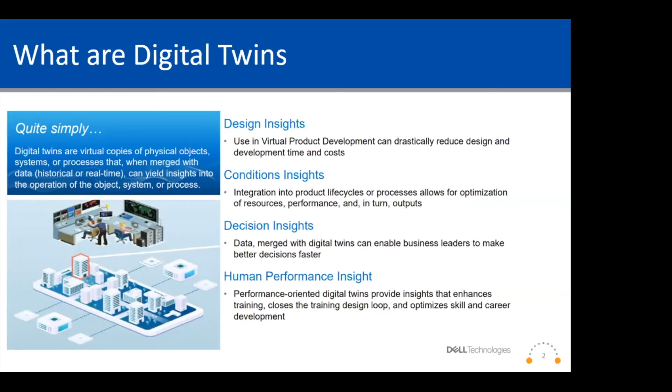So the digital twin effectively bridges the physical world with the digital world, providing data-driven insight for optimizing the source—in this case, the things, the places, or the people generating the data. By example, using predictive maintenance to maximize the value of the asset by extending its life, or to optimize the flow of product through supply chain optimization or assembly line optimization.

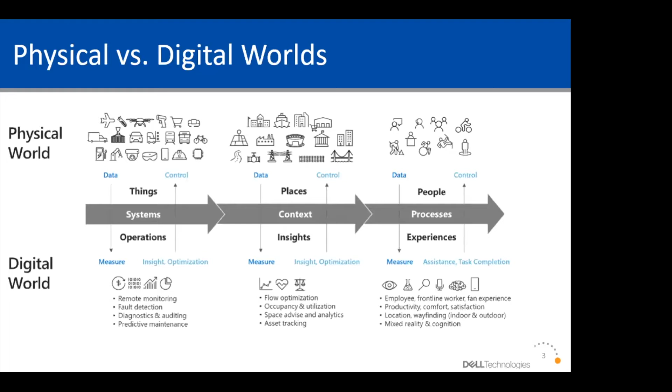Sensors can collect data about the impact of the external environment on the asset, and vice versa. In fact, through these technologies and others—such as 3D scanning for point cloud visualization—and other techniques, the digital twin can effectively take on a life of its own and be used to provide key feedback based on complex real-world data-based what-if scenarios that may or would not be possible to run on the actual physical asset. So with that idea in your mind, I will turn the presentation over to my colleague, John Turner from GAFCON.

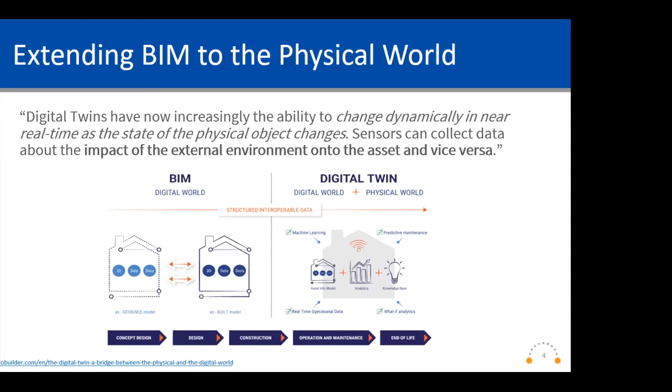John? Thank you, Dan. Good morning, everyone.

So in the background is one of our projects in San Diego, the redevelopment of Seaport Village and the waterfront. This is just one of the projects that we are applying some of these principles to.

So we're very much focused on the system supporting the complete life cycle. I'm assuming you're all familiar with integrated project delivery, which focuses on human collaboration through the entire project life cycle, from planning through design, procurement, construction, into operations. What I'm going to show through a very quick video is how data collaboration can support that human collaboration in very different ways.

I'm going to show you how you can use systems that you're all probably using today in a very different way from an owner perspective, very much focused on what we call the serial builder—doing the same things over and over again, or within the project, extracting the commonality in the project and making sure that things don't have to be created any more than once. And we have that digital thread.

So Dan, if we go into the video, and I'll narrate the video, it's about a 5-minute video.

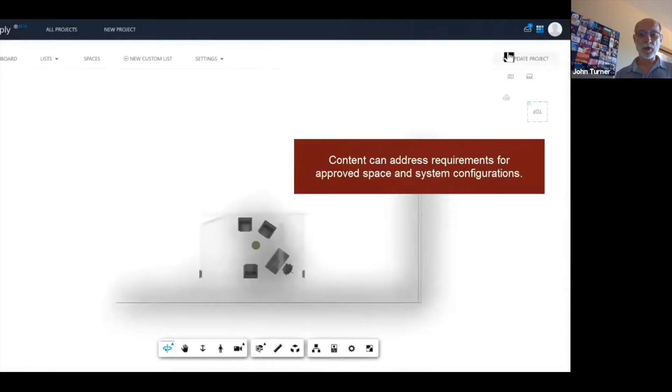So we start off with a product catalog, which is not only giving the objects which can be used directly by the architect or the general contractor, but we're also extracting commonalities. So here we've got offices and conference rooms, and these can be provided as collections of BIM elements that can go directly into the design authoring system.

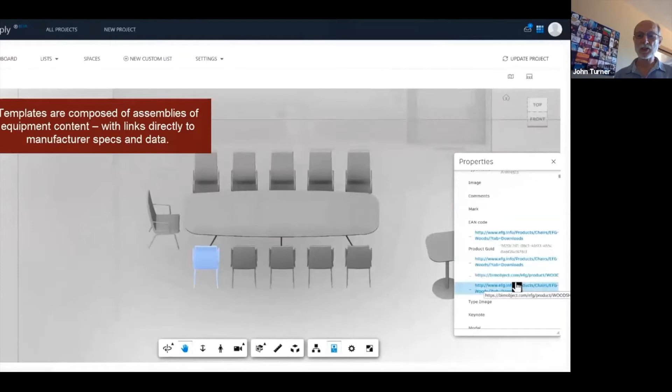But what I'm going to do is narrate this from the perspective of an office chair to show how data can be externalized from the BIM and then tracked all the way through the process. So you can see the office chair has been highlighted. We can take it from there to external websites or to external data sources.

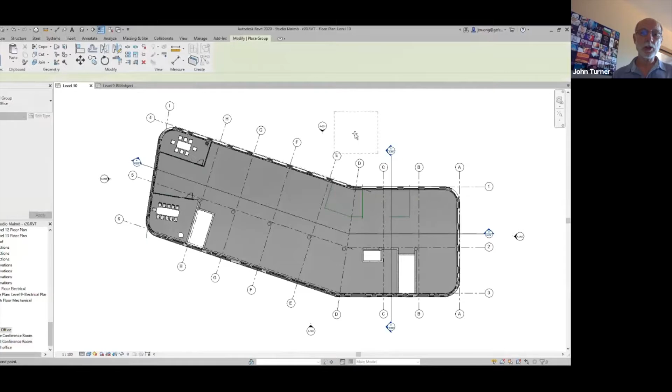We can then bring in these building blocks very much like Lego. Rather than building the entire Lego with what I call 1 bump bricks, we can start to use 4 or 8 or 16 bump bricks, and go through the design process much faster. We're not only dropping in the visual elements, but also all the externalized data elements.

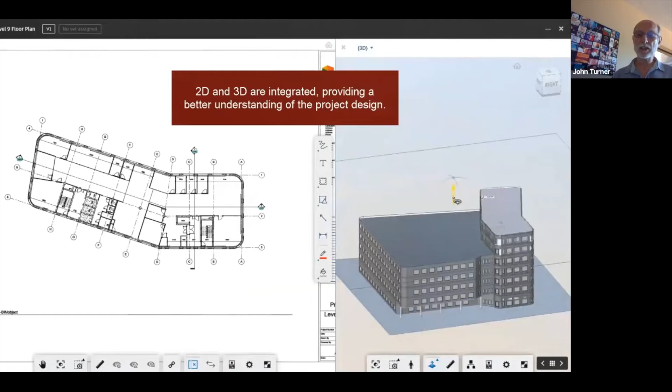A key aspect of controlling a project like this is to make sure that everything is kept within the same data model. So you'll all be very familiar with the concept of making sure that sheets are extracted directly from the BIM, from the 3D representation.

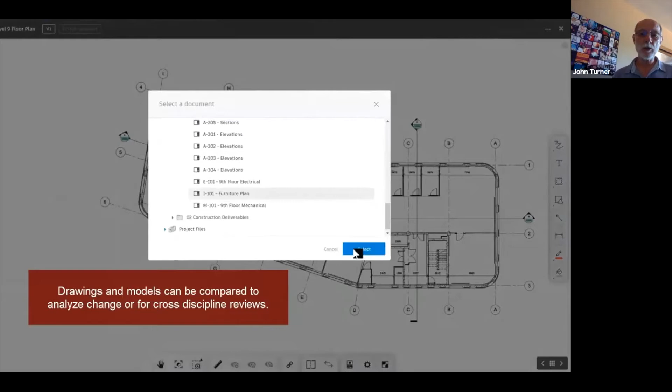You can see the conference room that we're going to use as our model, and here on the left-hand side is the floor plan. But if you've got a separate architect working on the furniture layout, the interior plan, we can now bring this directly in. We're using BIM 360, which you'll all be familiar with, to do this.

We can overlay the two plans, and we can see exactly what has changed from version to version of these drawings through visual highlighting. That's all done because of the data modeling.

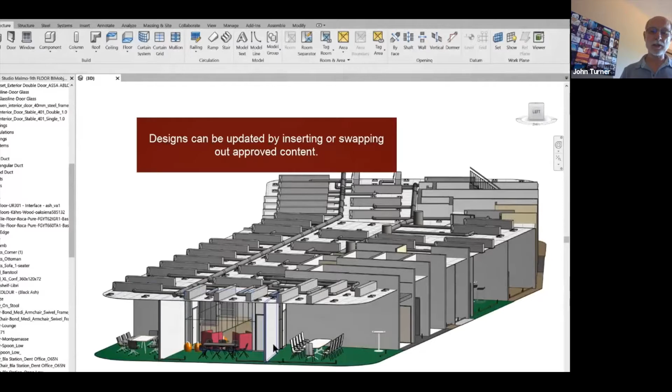Now we go into a standard collaboration environment. We bring in all the disciplines. And even at this stage, we are linking back to these external data sources so that we can start to make changes. So here's the chair.

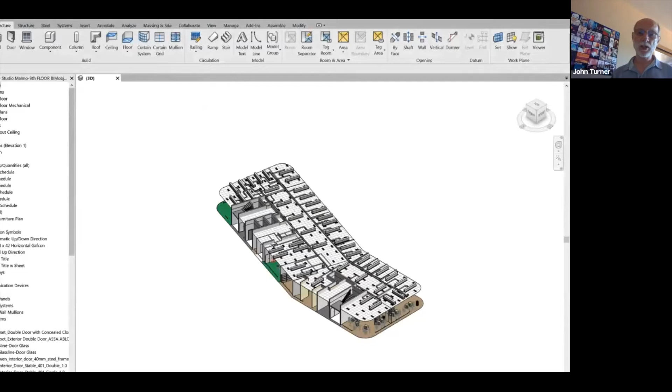What happens if I want to change its color? I want to change it from the gray to a red. I can do that now externally by working on the data source. That updates everything in the BIM—one change rather than finding every single change.

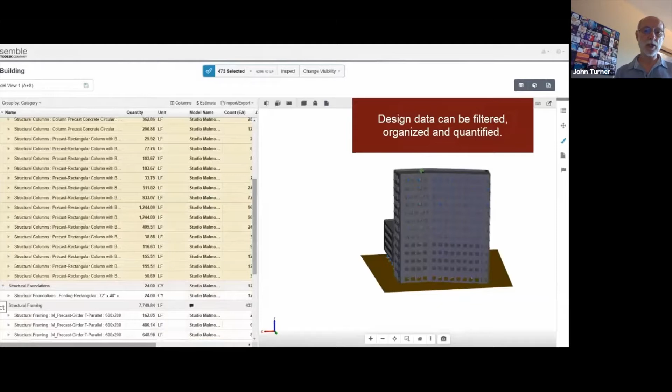As we then go into looking at costing, again using a standard software package, Assemble, we can go in and start to link all of the BIM elements because we have very strict naming conventions around the BIM elements. We can link those directly

to cost elements, and we can start to do value engineering with the owner in real time to see exactly how changing some elements is going to change the overall look and feel of the building, but also the cost of the building. So this is all done through making sure that the data elements are specified.

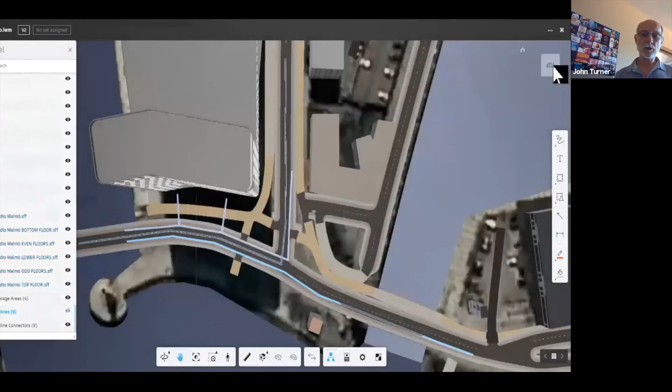When we're working on a campus, because we're always working in absolute coordinate systems, we can bring that building in and drop it into a geographic information system. So we can start to align it with utility information coming from public authorities, or we can start to link it back to civil engineering software.

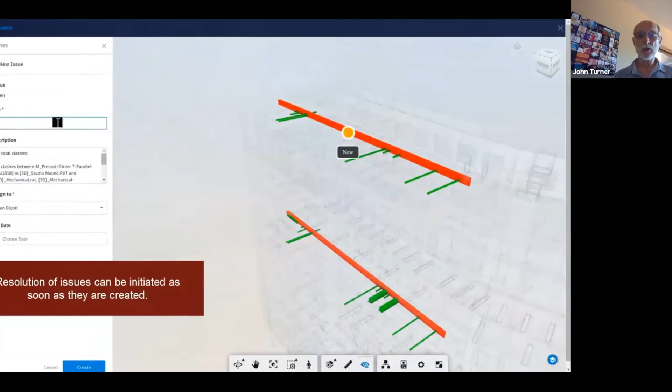Whereas architects think and design as though the world is flat, civil engineers have to design with gravity in mind. Linking the two often uncovers issues in the design stage, which would cost a lot of money in the construction stage. You'll all be familiar with using BIM for clash detection, but here we're not only using it for clash detection, we're starting to link it back to issues, and on a serial builder basis, we can make sure those issues are tied into lessons learned, so that from one project to another we're not encountering the same issues.

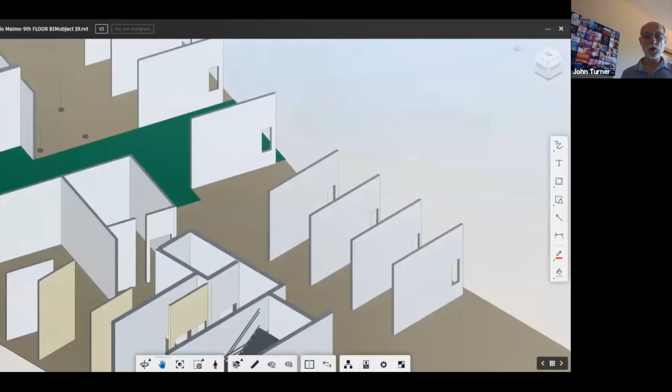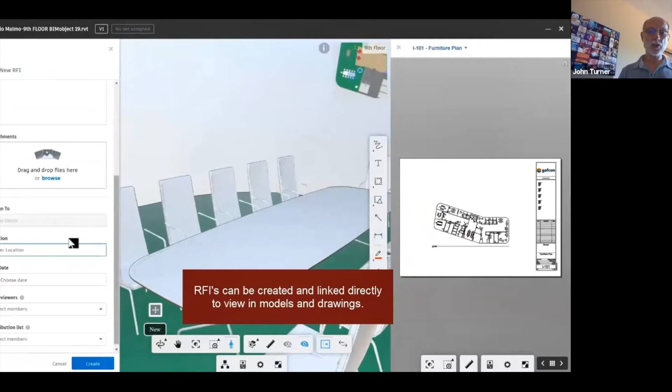You'll all be familiar also with the use of virtual reality. One of the common causes of project overruns, and remember those two red chairs when we go into the conference room, is owner changes. If we can show the owner what they're getting, and link everything together, the 3D, the 2D, and all the issues in a common environment, it's a lot easier to keep track of everything happening within the project and make sure the owner is making the correct decisions, even though they're not familiar with a lot of the technology.

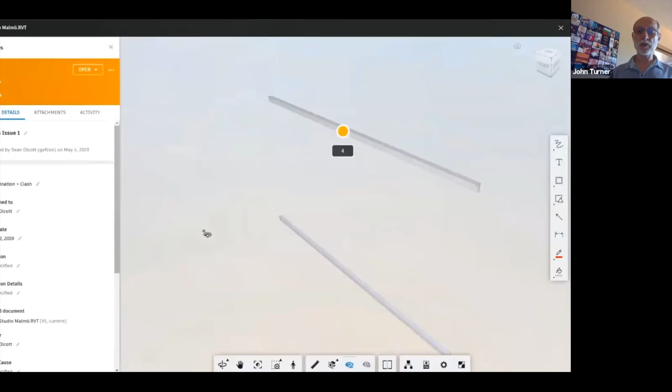We're also able to put together dashboards so that the owner can be communicated with very easily within the process, and drive directly back into the visualization of an issue, taking them directly into the BIM and into the associated documentation.

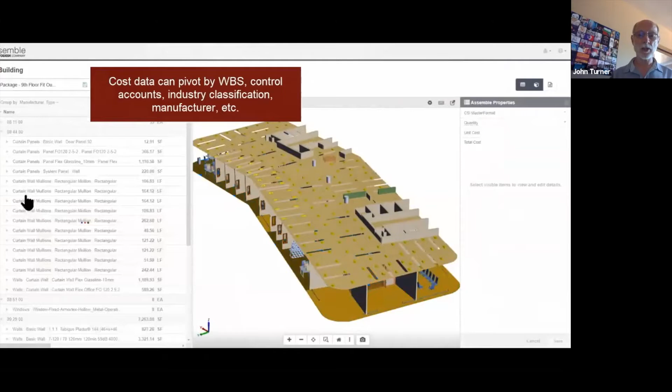When we get into the construction phase, we can then pivot the data once again, and in this case we're pivoting into a MasterFormat perspective of the data. It's exactly the same data model, you can see there's a slightly different visualization of it because we're focusing on a scope given to a particular contractor. So there's no argument about what is in scope or out of scope - we're not describing it in words, we're describing it in data.

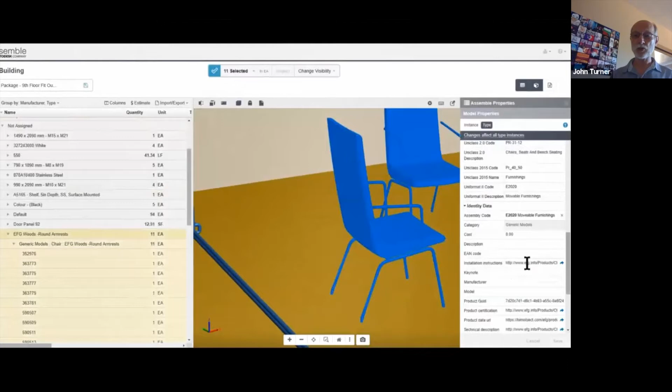Here, if the contractor wants to come back and change something, again here's the chair - if they decide they want to associate an individual cost with that chair, it can be done straight into that data model.

And then when we get into operations, we're going to do a Matterport scan of the finished building. As we walk through this building, you'll see a number of tags which link back to data. You'll see the same walkthrough as though we were doing it in virtual reality, seeing the same two red chairs which were modeled.

We walk in now to the actual conference room, and that chair has all the data available from all the upstream processes, which can then be flowed directly into the operational digital twin.

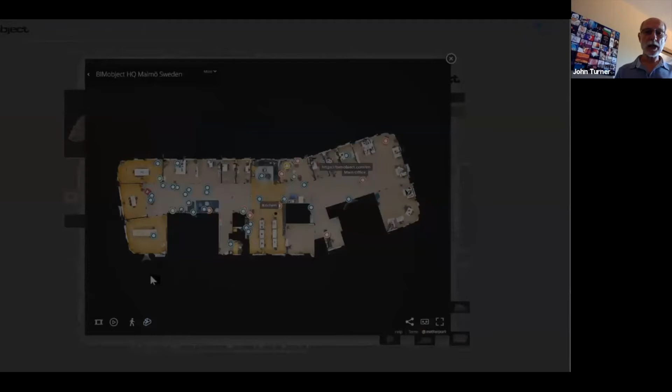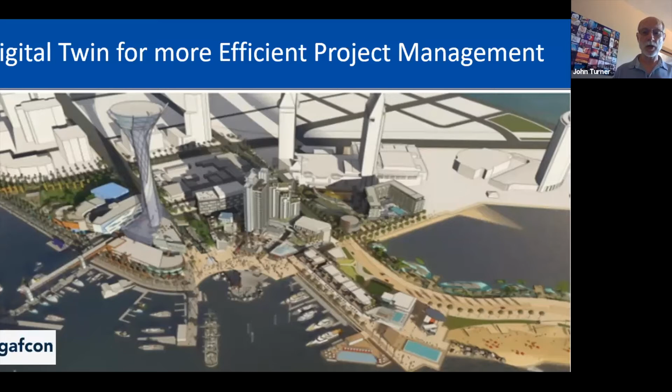So the key aspect there is to make sure that we are dissolving the silos of data which are normally apparent in the planning, design, and construction phase. And even in construction, the silos from the GC, procurement, and the trades, bringing it together in one model which can be digested by the owner so that the best decisions can be made as quickly as possible.

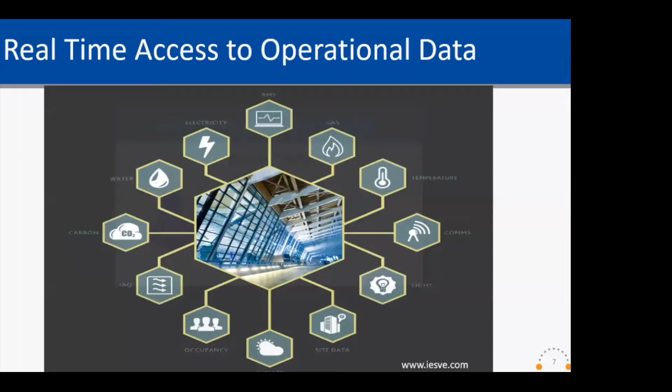Again, additional benefits in terms of improved performance analytics. So we talked about predictive maintenance, those aspects. Also, there's linking all that information, as you saw with the BIM, tying that in with the digital twin. You now have simplification in terms of tracking of warranty, schedules, all the different things, and actually having a visibility now that you wouldn't have had before, as demonstrated by John in terms of CapEx and OpEx planning.

In addition to reducing your risk and cost through integration of these systems, being able to track the performance, as well as having access to the latest in terms of smart building technology, and really implement that also in terms of overall predictive maintenance capabilities.

So a significant amount of value can be recognized through the implementation of the digital twin. Here's an example, carrying on a bit from what John was talking about with virtual reality. This is from a member of the consortium, CSDILA, the Center for Spatial Data Infrastructure, enabling better data-driven decision-making for planning and infrastructure development through the University of Melbourne.

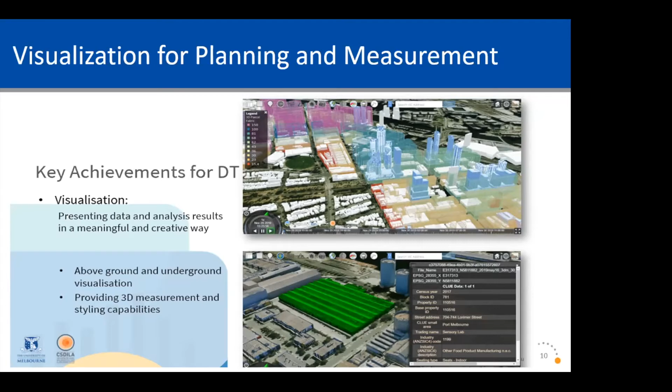It covers both above ground and subsurface visualization capabilities, giving both measurement and styling enhancements. Another example, from another member of the Digital Twin Consortium, looks at the overall framework in terms of sustainability.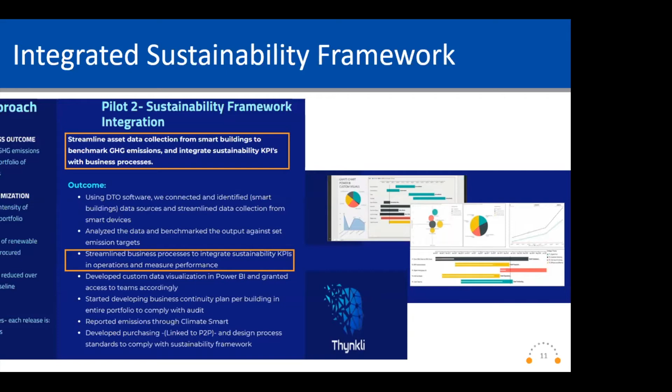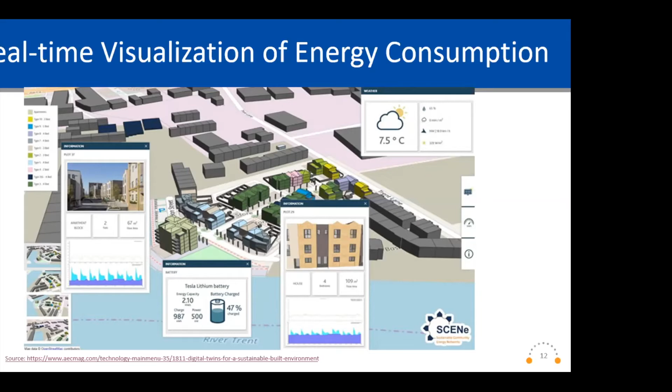Another example here is a visualization of overall energy consumption in real time. This digital twin takes all that data in real time and looks at energy consumption, and also how much energy could actually be put back into the grid. So, another example of optimizing performance and capabilities.

I wanted to talk a bit about the Digital Twin Consortium, looking at it from both the vision and the mission: the real goal and definition, looking at the ability to relate to policy, security, interoperability, and overall development of digital twins and digital twin technology. Looking at the definition from the standpoint of the ecosystem, standards requirements, types of architectures, and including open source.

Also looking for gaps in these different areas and how they might be addressed, publishing statements and opinions, including case studies and other reference examples. Working in very close partnership in an open and collaborative environment between industry, academia, and government, continuing to drive adoption and address interoperability, development, and innovation within the digital twin technology space.

Really driving that overall approach through consistency as well as open source development, with the commitment to help and guide outcomes for users, as well as to accelerate not only awareness but also market adoption.